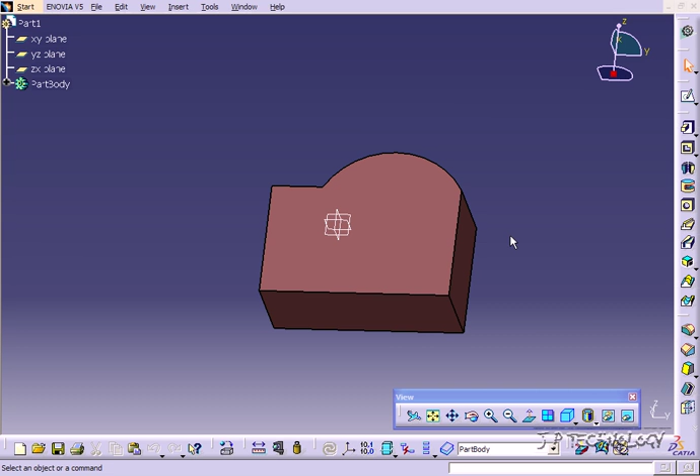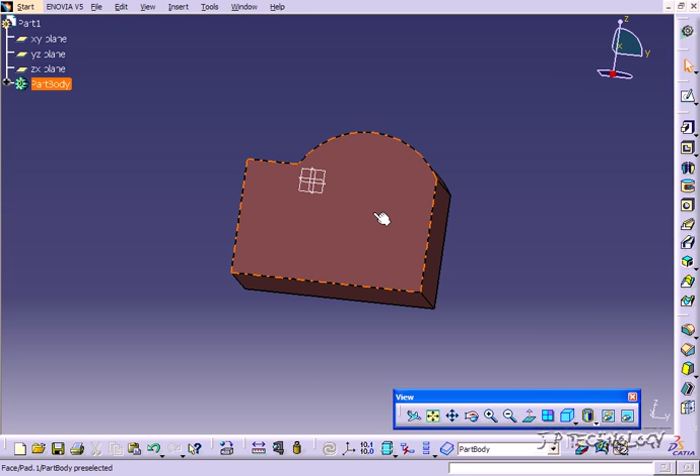how to utilize all these together. So what we're going to do in this tutorial is we're going to create a sketch on this face here, and we're going to say that we want it to be a circle that's the same size as this edge here. So we want it to be touching, and we want it to be on that circle there. So to do this, let's start off by clicking this face and click Sketch.

And what we're going to do is we're going to project this edge here. So let's click Project, and now we have this edge here. So now let's create our circle. Let's click Circle,

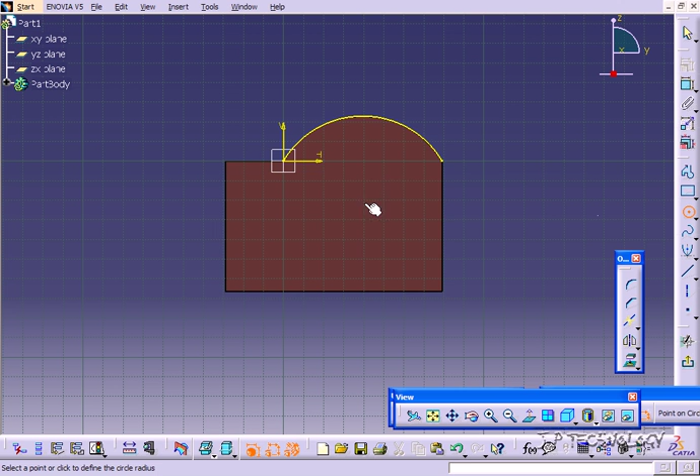and we're able to find the center point of the circle. If you put it on here, you can see that we're getting that dotted line, and as you go down, we're going to get that center point. So we have the center point, and now we're going to drag it out, and we're going to make it touch this edge here. So now we've created our circle.

The only problem though is that we have two drawings here. We have the circle, and we also have the extruded profile behind it. And to actually extrude it out, we need to delete that solid profile behind it. The only way to do that is by swapping the visible space, showing and hiding, to get rid of that other drawing. We need to get rid of it, because if we don't, we're not going to be able to extrude it out.

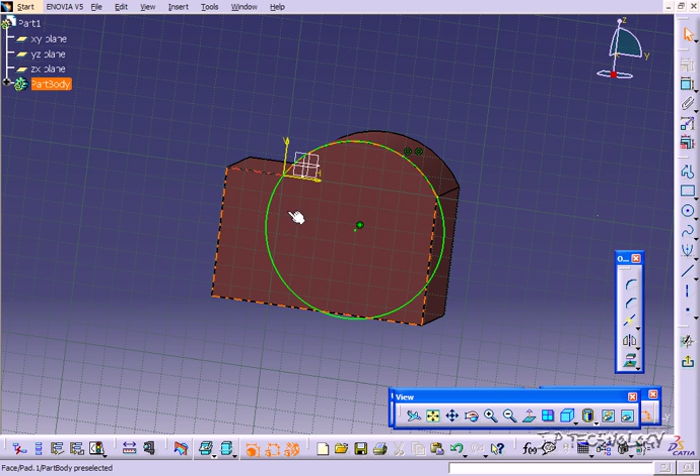So to do this, what we're going to have to do is right-click on this sketch that we just made, click Hide, and now we're able to see that sketch behind it that we need to delete. If we didn't hide it, there'd be no way of selecting that edge and deleting it. So let's click and click Delete.

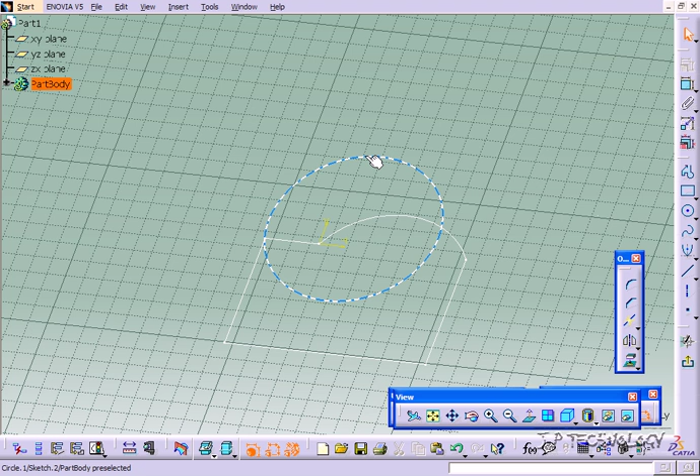Now we'll swap our visible space, and when we swap, we're able to see the drawing that we just hid. So let's right-click on it, click Show, swap again, and now we have our drawing. Now we have this drawing back, we don't have that projected edge behind it, and now we're able to go ahead and either extrude it or use any feature without worrying about that other edge.

So this is just an example of how to utilize the visible space, and when you're doing your drawings and creating your sketches, you're going to run into issues like these a lot of times, because you're going to have a sketch that you've made, but say an edge that you projected is behind it, and there's no way of getting to it without deleting the one that you just made.

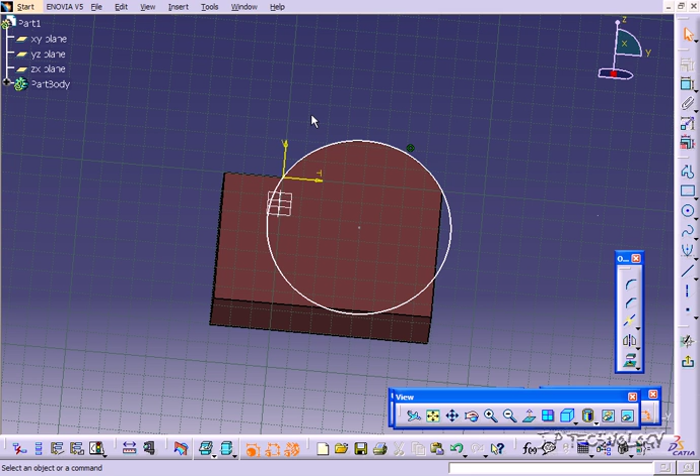So without deleting it, you're able to hide it, delete the original projected edge, swap the space, and bring that drawing that you just made back. And that concludes our tutorial on how to utilize the visible space within CATIA v5.